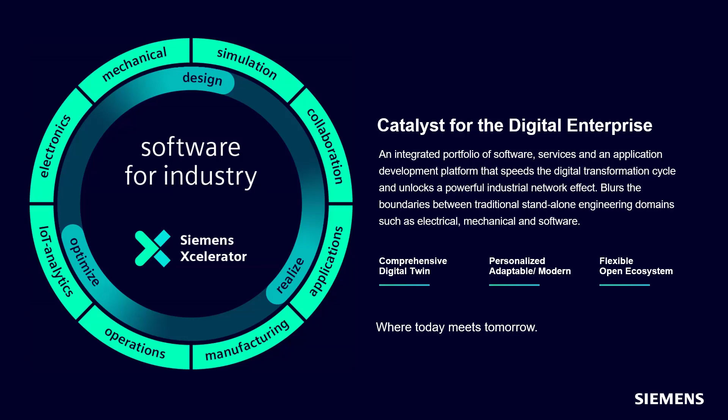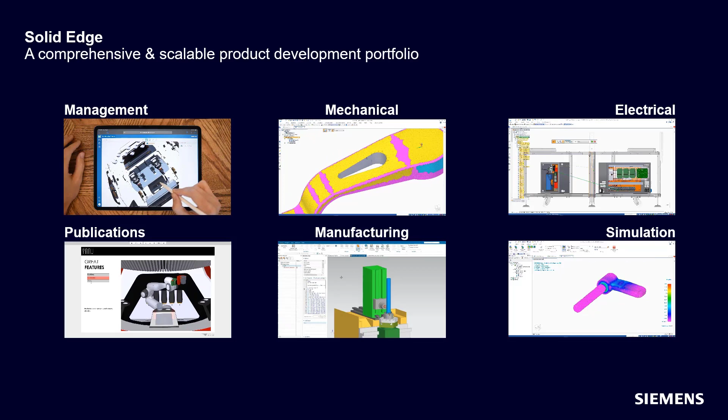Siemens Xcelerator really starts with Solid Edge. Solid Edge is a key part of the Siemens Xcelerator portfolio and is focused on the requirements of small and mid-sized manufacturers. Solid Edge enables manufacturers to create a comprehensive digital twin of their products, including solutions for mechanical design, electrical design, simulation, manufacturing, and publications. It also includes solutions for data management for all the technical data created and consumed when supporting the comprehensive digital twin. It facilitates collaboration both within manufacturing companies and external resources, including suppliers and customers. Solid Edge is truly your on-ramp to digital transformation.

We can help accelerate that digital transformation with Solid Edge 2024. Unleash the power of intelligent product design.

With this year's release of Solid Edge 2024, we continue to push the boundaries of product development. Solid Edge 2024 empowers users to design more intelligently across every aspect of product development. With a continued focus on the user experience and large assembly performance, Solid Edge 2024 introduces functionalities and enhancements to automate and speed design as well as collaboration. Here's just a few: there's 9 times faster graphical performance, AI assembly relationships, great advantages in intelligent dimensioning, and much, much more. Solid Edge 2024 is our best release yet.

Beta customers have already had an opportunity to experience Solid Edge 2024. Here's what one of them had to say: Each year, Solid Edge gets better and better. Everything is faster. You can definitely feel the excitement from folks like Karsten at FOCA, who had the chance to work with Solid Edge 2024.

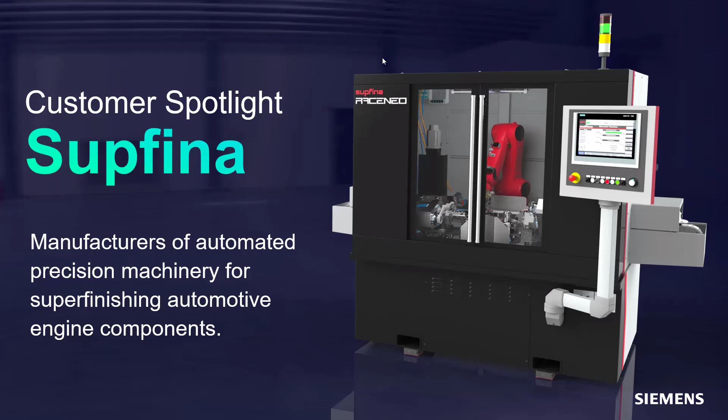Our featured company in this year's release is Supfina from Germany. Supfina produces high-precision, fully automated grinding and honing machinery designed for super finishing automotive engine components such as crankshafts and camshafts. Let's start with a look at some overall productivity enhancements. These are things that will definitely make your daily life easier. We are leveraging AI technologies in the design process and pushing them even further.

Let's focus on the polishing tool and fixture for these high-performance motorsport roller bearings. By expanding the assembly features in the Pathfinder, we notice a hole and cutouts were added at the assembly level and need to be completed with a round and a chamfer. This can be solved by reordering the assembly features with a new, simple drag and drop process that resembles reordering part features. This allows you to move the parent and child features together, keeping your model organized. The polishing tool has a 3D printed component that requires 2 holes to be added.

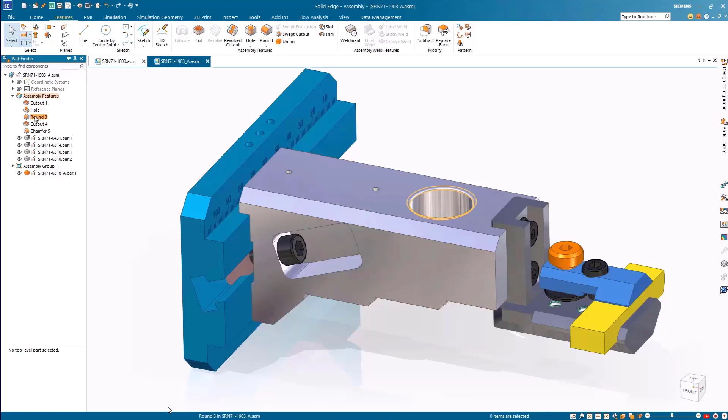To ensure an appropriate fit in the assembly for the 3D printed threads, we can define additional clearance holes using the hole command. The values can be put in either as a percentage or an absolute value. By selecting percentage, the internal diameter will increase by a percentage of the nominal diameter, seen in relation to the sketch. We can also switch the option to absolute and enter a specific measurement.

To finish off the assembly, the polishing tool can be added at the bottom of the cylinder. By adding a mate, planar line, and axial line with the hole, the component now matches the main assembly. Using the new Resolve Relationship Conflict dialog box, we can easily identify and suppress conflicting relations to resolve them swiftly. This new tool helps streamline part placement and assembly relationships. Hovering over listed conflicting relationships on the dialog highlights them graphically. One or more relationships can be suppressed at a time, and the requested relationship turns green.

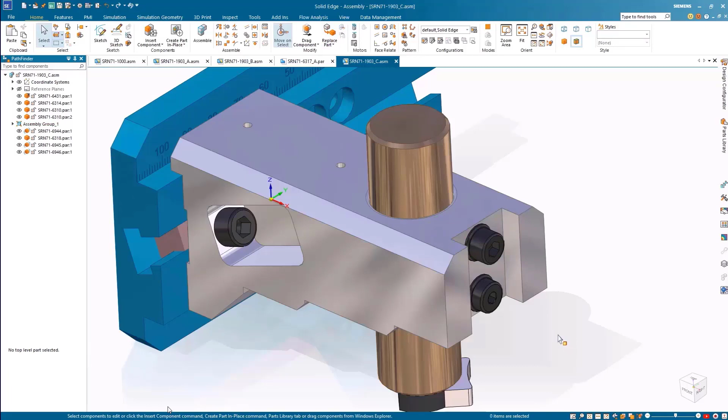The improved Replace Part command leverages artificial intelligence to predict solutions for replacing a single component occurrence constrained to a neighboring component within an assembly. The AI predictions support planar and axial line relationships and present the solutions in a secondary dialog, allowing us to preview and select the most suitable option before executing the replacement.

Enhancements to the variable table filter provide quick access to the filter options, resulting in an efficient experience that reduces both time and mouse clicks. The variable table can be used to reposition the polishing tool to ensure they will contact the bearing at the correct locations. With numerous variables in the assembly, the results can be filtered by user-created, system-created, or both. Another great option for filtering is to only view variables relative to the components that you select. This makes it easy to find the swivel angle variable and make a change. The vertical height of the polishing tool can be changed by updating the Z axis value.

One of the highlights you saw was physical thread clearance on 3D printed parts. This is really important because unlike manufactured parts, where standards define clearance and tight tolerances to keep things working smoothly, 3D printed parts can get clashes that prevent smooth operation. Solid Edge automatically eliminates these, ensuring your printed parts work effectively.

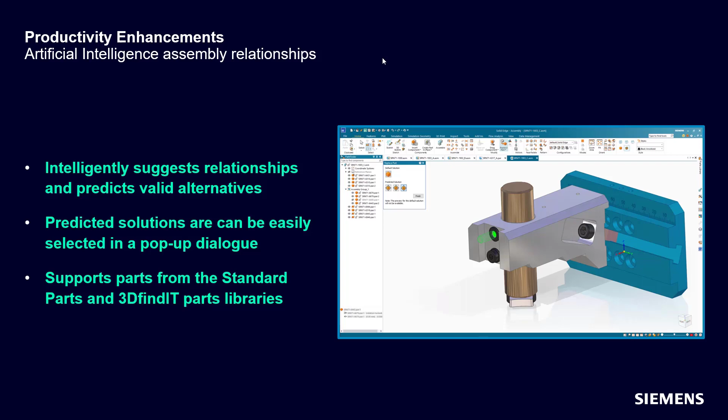You also saw the power of AI in action. With the improved Replace Part command, Solid Edge can now intelligently suggest assembly relationships and predict valid alternative solutions. These predicted solutions are graphically previewed in the design environment and can be easily selected in a pop-up dialog. In addition to working with your custom part designs, the AI-enhanced Replace Part functionality also works with parts from the standard parts and 3DfindIT parts library. Really powerful stuff that will save you a lot of time.

Here's what Dave Iverson of Ariel had to say about Solid Edge 2024. We love the fact that he said, do more of the fun stuff. The reality is we often end up doing tedious tasks. Let the computer do them. That's what AI in Solid Edge 2024 can deliver.

Let's take a look at some more productivity enhancements in Solid Edge 2024. Locating just the right part has never been easier. Search wildcards are supported in part libraries, model view palettes, and the Assembly Pathfinder. These wildcards provide flexibility when searching, allowing you to match and retrieve parts based on partial or incomplete names. Search results display subassemblies and parts in various shades of green for easy identification.

With the expanded family of parts options, flat patterns can now be included while working on sheet metal parts, containing the information you need to create drawings and annotations. Once we define the new members, we can see options to capture sketches, file properties, and variables. Further enhancements include the ability to set individual material properties per member, as well as control over the suppression state of sketches and etches. Selecting a specific member shows the material change alongside the different etches specific to each member.

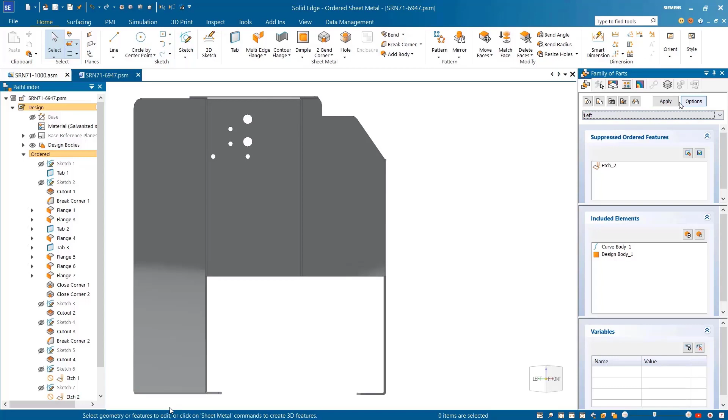Greater control of selecting objects has been added with the polygon and lasso selection fence options. This makes many common workflows much easier, like resizing holes. Using the lasso selection option, we'll select the desired hole and change the size. Polygon and lasso selections are available within the part, assembly, draft, and subdivision modeling environments.

Many designs require handed parts. These symmetrically opposite parts are identical, mirrored copies of one another. A new streamlined workflow makes it easier to create these left and right-handed parts that can remain associative to the original part if needed. With the selection of the face, mirror, and a quick save, the new handed part is immediately available for use. The best part of using the Save as Mirror command is that all the features used to create the sheet metal part are carried over, minimizing errors and making downstream changes easier.

The display of bend lines in the flat pattern environment is now supported within the sheet metal environment. Color coding defines bend direction: up bends are displayed in blue, down bends are displayed in green. The color and style of the center lines can be easily modified to suit your company standards.

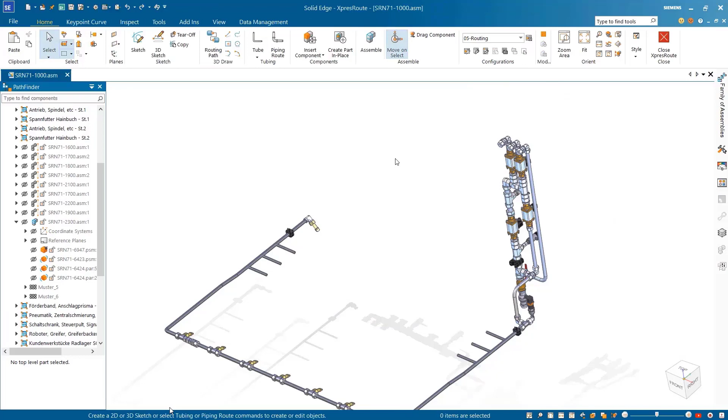In the Solid Edge XpresRoute, pipes and tubes can now be automatically trimmed with the help of the new trim command. In this example, after turning on the clipping planes, we can see there's an overlap between the main tube and the three cleaning tubes. We can trim these tubes so they join together seamlessly with just a few simple clicks. By selecting the primary and secondary tube, the Trim Tubes command intelligently cuts holes in the main tube and the outside diameter of the secondary tubes, and trims the cleaning tubes to fit.

Another new capability in Solid Edge is the Recent Documents Preview, where we can easily select a part we'd like to work on without exiting the design environment, saving time and energy.

The sheet metal cover requires some modification: the addition of several punched holes. Seven construction bodies have been placed in the sheet metal part to represent the punches used to remove the material. Using the Subtract command, we can select the main target body, then easily and quickly choose these bodies as a tool step, all within the same window. Unwanted regions left behind as a result of the subtract operation, or disjoint regions, can be intelligently identified and automatically removed.

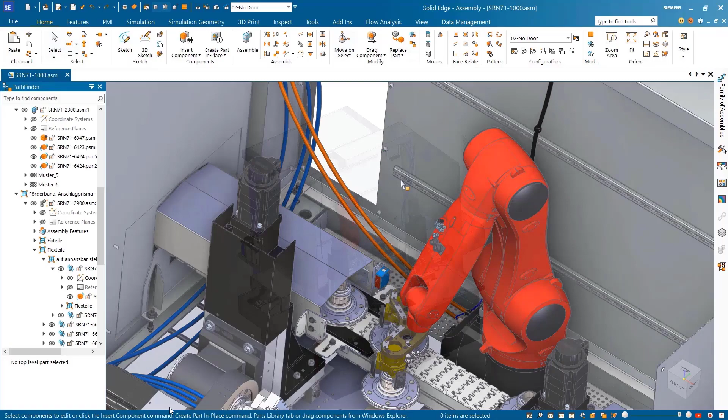Hiding the construction bodies, we can see all the internal disjoint regions within the sheet metal part have been removed. Now, obviously, Solid Edge has had the ability to create left and right-handed parts for many years. But did you catch the breakthrough here? Optionally, instead of just producing a body, it will create a mirrored part with a fully editable feature tree. This, frankly, was quite a tough problem, with quite a few requests for it. And we're very happy to bring it to you in Solid Edge 2024.

You also saw a ton of other great enhancements. Just to highlight a few, now Family of Parts not only creates correctly sized bodies based on the parameters, but it also supports material, etches, coordinate systems, sketches, and more. This was a long-standing request, and we're very excited to deliver. Lasso selection can be handy in so many circumstances.

Now it's super easy. In often requested enhancements, the new Trim Tubes command automatically trims and cuts holes in intersecting tubes in the assembly environment. It not only supports the tubes that butt against each other, but also end-connected tubes that can automatically be mitered. Variable table has been really improved, allowing users to access the filters more easily and quickly, saving time, money, and

reducing mouse clicks. When placing parts, conflicting relationships can now be automatically identified, giving the user the ability to resolve the conflicts easily with a pop-up dialog that displays the issues, and much more: matching coordinate systems, reordering the assembly features, removing disjoint regions, the list goes on and on.

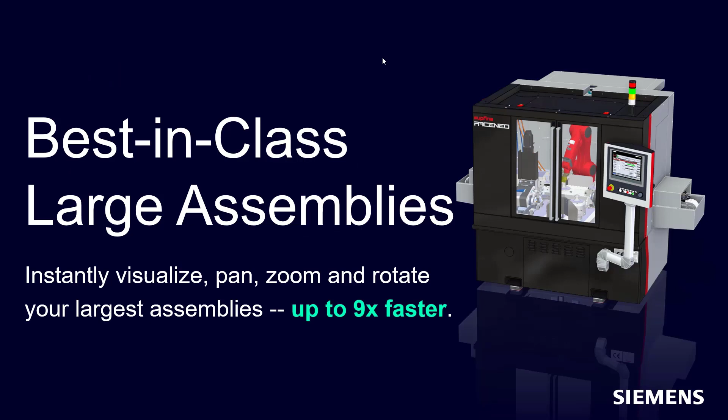Next up is large assembly performance. Solid Edge truly has best in class for large assemblies, and now it's even better. Better with model view performance that allows you to view and manipulate even the largest assemblies without lags, stutters, or buffering. New immersive view styles put your models into a real-world environment that automatically updates with the model in movement

for even more realism. As you can see, the view manipulation is automatically optimized, allowing users to run the most demanding assemblies at lightning speeds without the loss of detail or the need to adjust settings or hide features, parts, or assemblies. Dynamic viewing is up to 3 times faster on single parts and up to 9 times faster for very, very large assemblies.

Companies like Hatch are building some of the largest assemblies in the world, and as John notes, the Solid Edge 2024 advancements have a huge impact on their designers, as much as 30% productivity improvement.

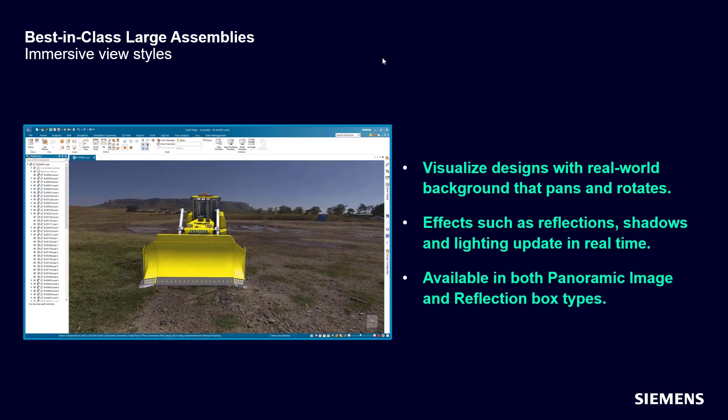In addition to the amazing speed improvements, you can now visualize designs in a real-world background that pans and rotates with your model to create a more immersive user experience. As the Solid Edge design is manipulated, graphic effects like reflections, shadows, and lighting are also updated. This creates a more realistic, lifelike representation of them in the model's environment, just like you were walking around the model in the real world.

Next up is Design Configurator, and I want you to pay special attention here because we know so many companies can benefit from this technology. Not only can you configure your own designs instantly, but we are now delivering pre-configured conveyors and ladders and other equipment that is commonly used in large machines and plants. It's an incredible time saver. Let's take a look.

Manufacturers are facing increasing pressure by their customers to offer greater choice and variety in their products. This can lead to an increase in the number of product variants organizations need to define, author, and manage. New pre-configured models in Solid Edge Design Configurator allow you to quickly and easily place intelligent datasets for ladders, conveyors, enclosures directly into your design.

The ability to customize fully configured subassemblies inside the main assembly helps simplify workflows and improve productivity. In this example, a fully configured ladder assembly is being modified directly within the main assembly environment. There's no need to go back to the subassemblies and configure them individually, saving you time and energy.

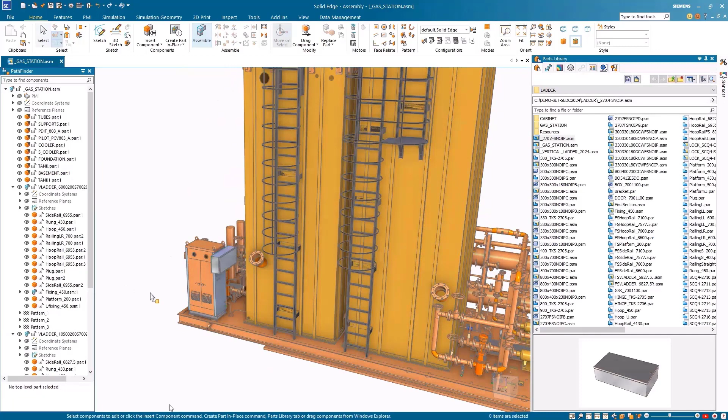A secondary ladder is needed to complete our design. After placing the ladder, we can customize the length. Due to the model's rules, a second section and hoop in the middle are also added. To finish up the assembly, we need to add a final cabinet. The cabinet can be customized inside the main assembly with the necessary dimensions and colors to fit our needs.

With access to fully configured datasets such as ladders and cabinets, it's never been easier for customers to get started quickly with Solid Edge Design Configurator. With the new subassembly command alongside the place part model and loop action commands, full assemblies can be placed and configured right on the spot.

With these new workflow model actions, brand new assembly lines can be built quickly and easily. Here, the base conveyors and other necessary components are being added to create a new assembly line. Solid Edge Design Configurator can automatically calculate the number of conveyors and other components needed to match user specifications.

By inputting 10 meters, the software automatically determines the number of conveyors needed within a specific time and distance to complete the line. With the last machine added, the new assembly line is finalized and ready to be used.

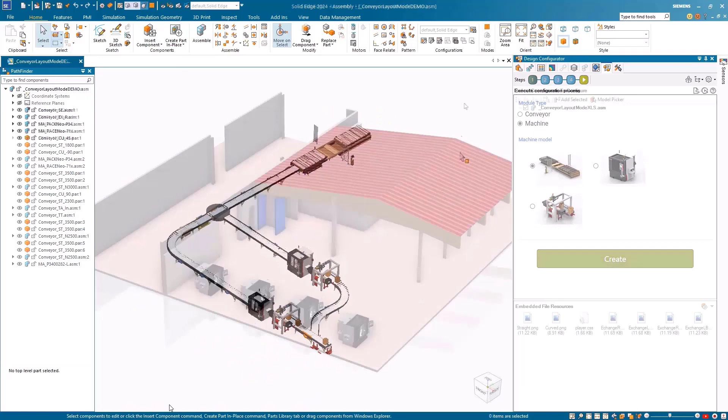The new ability to read Excel files and external databases for input data in the model action allows you to automatically complete assembly lines in a fraction of the time. By reading the necessary conveyor placement data from an Excel file, the software instantly configures and completes the assembly with just one click.

Wow. Isn't that amazing how quickly those ladders went into place and were fully configured in seconds? You can really boost design speed by using pre-configured models of ladders, conveyors, and enclosures. One of the most requested customer features, pre-configured models, downloaded from the Solid Edge Support Center, can now be directly used in the assembly at no cost to the Solid Edge Design Configurator users.

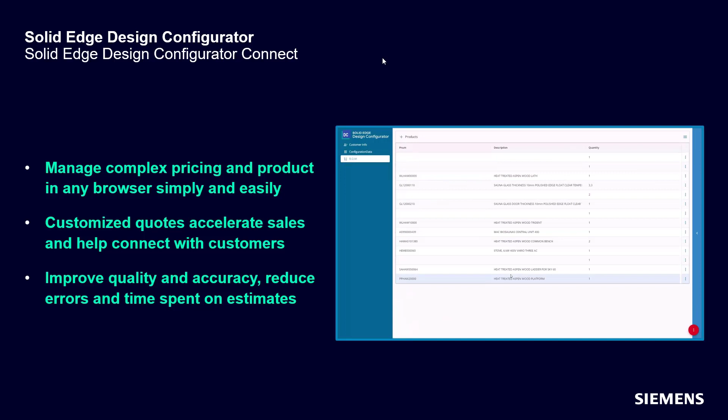In addition to all the great Solid Edge functionalities you saw configuring your designs, you can also take advantage of the Solid Edge Design Configurator Connect. This is a user-friendly, web-based configurator that manages the most complex pricing and product configuration, allowing users to configure online in any browser simply and easily by automatically generating sales documentation, including the 3D models. Connect your engineering process with sales and marketing, streamlining design workflows with the new Solid Edge Design Configurator Connect.

Michael Orr at Ariel quickly saw the value of Design Configurator and how it leverages data, your data and knowledge, to really streamline assembly customization. He notes that it could be a big time saver.

Model-based definition, often called MBD. It's all about moving the intelligence of the drawing upstream into the model. Why should the geometry be in the model and the critical information like tolerances be in the drawing? When we move all the intelligence into the model, we lower the 3D communication barrier and better convey design intent for downstream manufacturing processes.

Intelligently define and annotate 3D models while better conveying design intent for downstream manufacturing processes with the new Solid Edge Advanced PMI and model-based definition capabilities. The improved Auto Dimension tool in Solid Edge Advanced PMI can be used with 1 or 2 datums for more freedom while automatically dimensioning turned parts. Using the new Recent Documents preview will open another bracket that's been partially dimensioned.

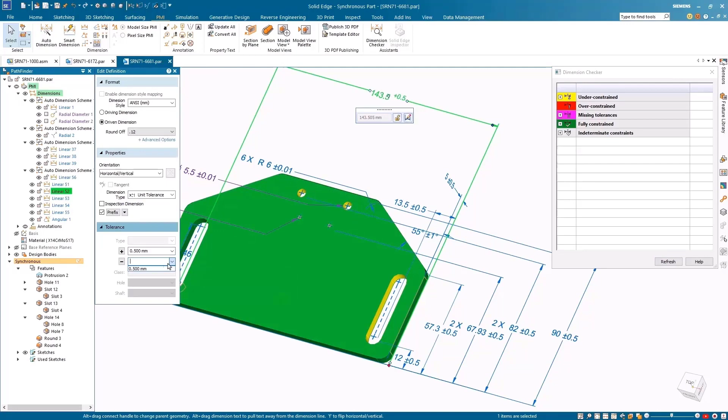With the new Dimension Checker command, quickly and easily identify the constraint status of features and parts. The model is automatically color-coded with feature IDs, informing you of the constraint status of features and if they lack any tolerance information. In this example, the slot and holes are under-constrained, and a dimension is missing a tolerance value. By adding the necessary tolerance, Dimension Checker will instantly update with the new status, and the Auto Dimension tool will automatically add the missing location dimensions for the holes, improving creation speed.

The improved Auto Dimension tool also includes stack dimensions and callouts for slot and oval cutouts. Features chosen in the selected primary, secondary, and tertiary planes can be auto-dimensioned instantly, and you can now automatically dimension location and size callouts for your created slot and oval cutouts.

The Common Model Views command allows users to create common model views automatically with the existing PMI. With the required views selected, Solid Edge automates view creation. Applying section views to a model view is easy with the enhanced vertical command bar that can be launched from the Model View palette. These easy-to-use command bars make editing model views simple, like adjusting the render mode as we see here.

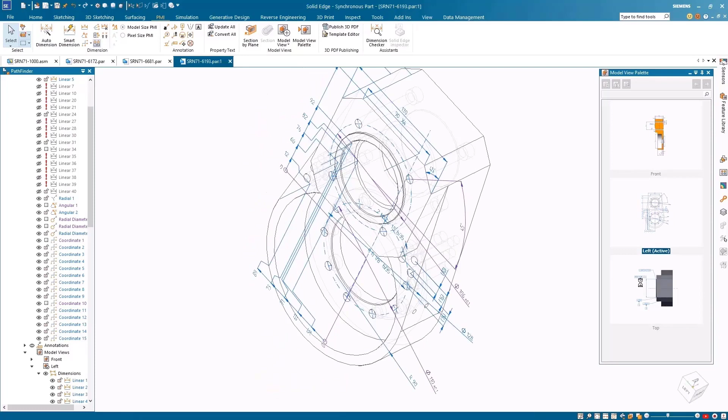To clean up the PMI dimensions, we'll run the enhanced Arrange Dimensions command, which provides the ability to arrange coordinate dimensions alongside the linear dimensions. The Update Model Views automatically updates all model views when the model changes or PMI is added or removed. Auxiliary plane indicators can be added, giving you more freedom to annotate the models based on ISO or DIN standards.

Convey design intent for downstream manufacturing processes with 3D PDFs that can be published using templates. You can now export PMI views with selected section views and render styles to the 3D PDF, including those created with single planes, to streamline the delivery of relevant design information. With new PMI face association, parent faces and section views are automatically highlighted when they are selected in the 3D PDF. For assemblies, 3D PDF documents can contain an interactive parts list.

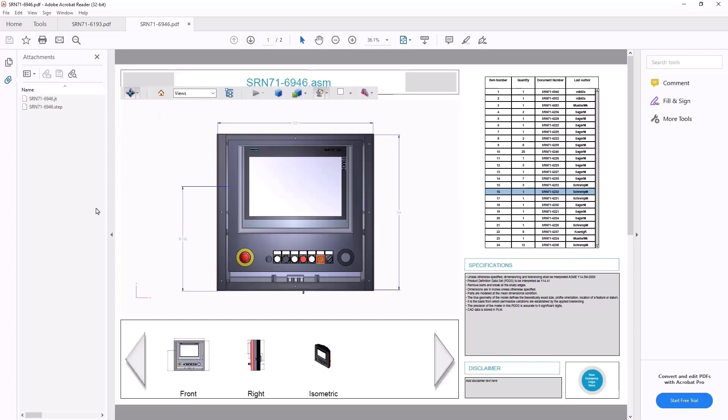On selection, parts are highlighted in the list and graphics window. Associative properties such as author can also be included. STEP, AP242, and JT files can also be generated and added as attachments within the 3D PDF.

Interoperability enhancements allow your Solid Edge files to look the same when opened in other Siemens Xcelerator portfolio solutions such as NX. The improved PMI association and support for various PMI data provide increased connectivity for downstream applications.

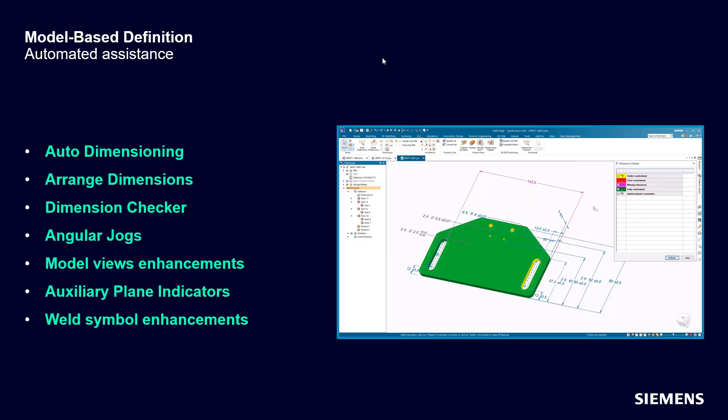With Solid Edge 2024, there are some great enhancements here to get you on this path. Auto dimensioning has a serious upgrade, and the Dimension Checker really lets you understand if your dimension scheme is complete. And there are many other enhancements. So now is the time to start getting going with Solid Edge model-based definition. And don't worry, you can move at your pace. Either drawings or create simple PDFs, it's up to you.

We're always amazed at how seemingly small improvements can make such a big difference. Ken at Pella was really taken with the new, better layout and the auto dimensioning it provides. A huge help to his team.

As mentioned before, don't worry, drawings aren't going away and Solid Edge will continue to be the best in the business. But if you are further along in your journey and looking to publish 3D PDFs, we've got you covered. For example, 3D section is now supported during Publish. And you can now graphically highlight items in the PDF and see where it's associated. This is really helpful in downstream interpretation.

We've been talking a lot about core CAD functionality, and that is truly important. But more than ever, collaboration is key to improving engineering productivity. No one could have anticipated how distributed our teams would become in recent years. But we definitely have some amazing tools to support this. And this comes in the form of Solid Edge SaaS, where collaboration is built right into your daily work. We'll be taking a closer look at this later in our session.

You can access Teamcenter Share's comprehensive suite of collaboration capabilities fully in the Solid Edge environment. The complete Share Web user interface, UI, is embedded entirely within Solid Edge 2024 for more streamlined collaboration workflows. The same browser-based experience of Teamcenter Share is available anytime, anyplace, on any device as before, but now Share is also available without leaving Solid Edge. This saves users time by eliminating the need to switch between the different application windows.

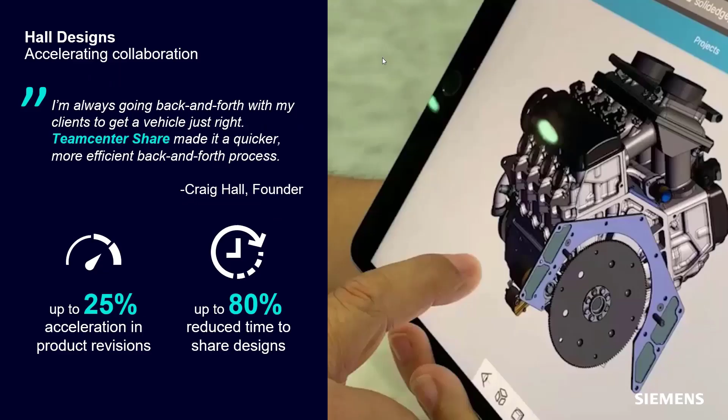In addition to Sunny Bay, many other customers are already doing great things with Solid Edge SaaS and the built-in Teamcenter Share, like Craig Hall at Hall Designs. Hall Designs are using the new cloud collaboration capability of Solid Edge SaaS to collaborate more effectively and reduce their design and development time and dramatically streamline their communication with clients. Look at these numbers, 25% improvement on revisions, 80% time savings sharing the designs. Now that's pretty substantial productivity.

Solid Edge CAM Pro also received a great update. Get faster and more accurate programming with Solid Edge CAM Pro. Let's take a look.

Solid Edge CAM Pro improves productivity by enabling artificial intelligence to present the machining options that are used most frequently with AI-assisted operation editing. The prediction node will guide you through the operation editing process. Suggestions will be made based on the machining application and your programming style. Over time, the prediction tab will contain the items you most frequently edit, making it the go-to spot in the operation. No more hunting for options, as the AI assistance is customized for each user based on your preferences.

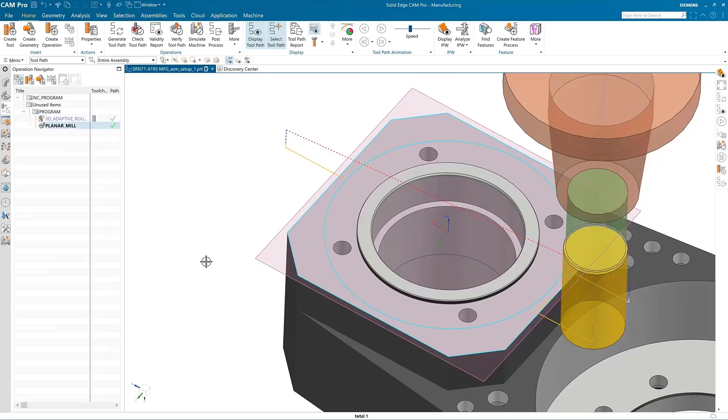With auto-generate for simple turning operations and certain 2.5-axis operations, you no longer have to generate the operation. As soon as enough parameters are available to calculate the toolpath, Solid Edge CAM Pro takes care of it. This makes NC programming faster, allowing you to review the results quicker. Similarly, any changes that require recomputation are automatically performed. See the latest results as soon as the parameters are changed.

Prime Turning by Sandvik increases productivity by removing more material in a shorter amount of time, enabling faster speed and increased tool life. Using either Sandvik CoroTurn Prime A or B turning tools, we can quickly, efficiently, and safely remove the material from this undercut. Notice how smooth the entrance and exits are, which produces less stress during the cutting and helps the inserts last longer.

3D adaptive roughing provides the most efficient rough machining possible. It reliably and dynamically checks for tool holder collision when the tool moves within a region or across multiple regions. Toolpath generation is faster, bottom-up cutting has been enhanced, and a top-off flat faces option has been added for faster throughput.

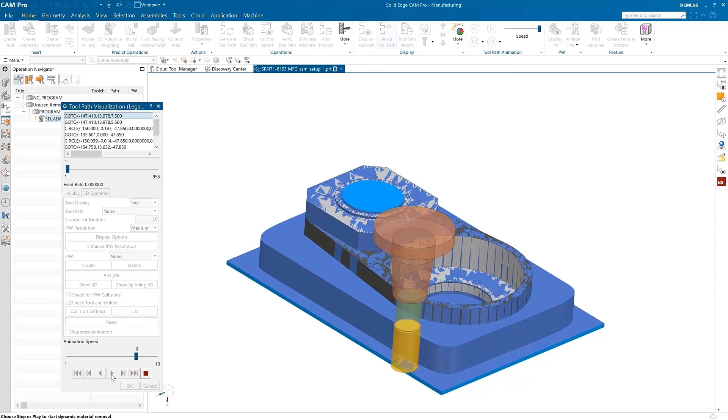The Cloud Connect tool library, as the name implies, stores cutting tools in the cloud database for easy access. Tools and holding devices can be easily searched, downloaded, and modified. Immediate access to cutting tool vendors is also available from the same location.

Generate toolpaths on flat surfaces with complex shapes using the face mill mid-pass operation. This feature, perfect for the milling of casted flanges or any other oddly shaped flat surface, automatically calculates the midline distance between the edges of a face and places a toolpath on it. For users that desire the cutter to be off-center of the flange, the operation can also create a toolpath along a shape described as the convex hull of the face.

The face mill mid-pass operation can greatly improve productivity for this type of machining, eliminating the need to manually create a boundary line for the cutter to follow. This allows you to create the operation in minutes as opposed to hours.

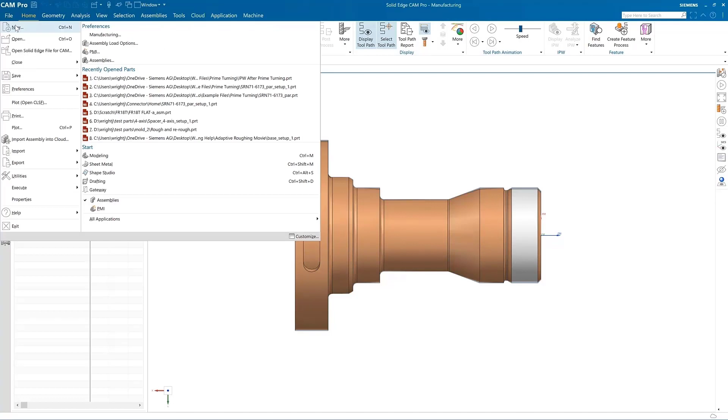Save your in-process workpieces as faceted bodies in separate files. These models can be used for future machining operations, the creation of manufacturing planning operations, or the construction of secondary machining fixtures and jigs. These in-process workpieces can be saved at any stage during the machining process, even in the middle of an operation.

Turn milling is designed to easily machine symmetric and eccentric cylindrical surfaces with high surface quality, precision, and high cutting volume. An operation subtype in the rotary milling template, turn milling is used to pre-cut cylindrical parts before finish machining with other rotary milling operation subtypes.

Solid Edge CAM Pro provides cutting-edge updates that accelerate machining while bringing the power of artificial intelligence and the cloud to your machining processes. There are some real time savers in there. The 3D adaptive roughing means faster programming and more efficient machining, while the AI-assisted operation editing predicts the most probable parameters, accelerating programming processes and ensuring accurate repeatability.

The new prediction mode will learn from the user's best programming practices to dynamically change and predict user behavior. The Cloud Connected Tool Library is a new application that utilizes the cloud and provides a user-friendly, intuitive experience when previewing tools and dimensions. And Prime Turning is now supported. Prime Turning is a new methodology which enables turning in all directions, resulting in a 50% productivity increase for turning operations.

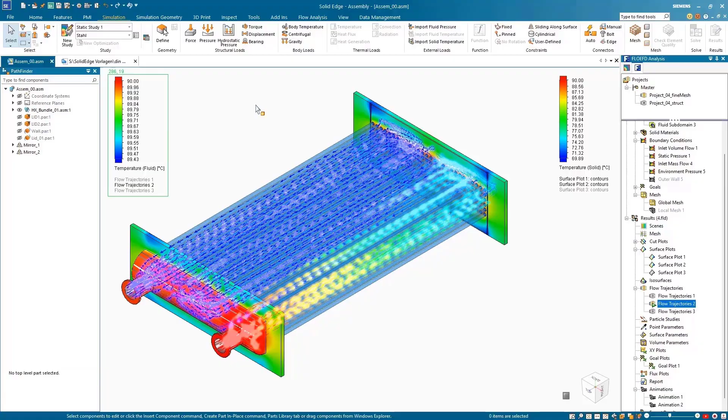Enhancements in Solid Edge simulation and Simcenter FloEFD for Solid Edge increase simulation performance and speed with improvements on meshing, structural analysis, and interoperability. Let's check that out. Increase your simulation speed, performance, and reliability with new enhancements in Solid Edge simulation. Instantly import solid temperature results from Simcenter FloEFD for Solid Edge into a static simulation study with the new Import Solid Temperature command in Solid Edge simulation.

In this example, the results of a FloEFD simulation in a heat exchanger and the temperature distribution of the fluid flow on the parts are shown here. Switching to Solid Edge simulation, we already have a study created with all constraints but without any loads. Using the new Import Solid Temperature command, we can set the load for our simulation study and start the solve. The Solid Edge simulation study processes the results from FloEFD and solves the calculation.

Viewing the results, we see high stresses in the parts as a result of the temperature loads. Interoperability between Solid Edge simulation and Simcenter FloEFD for Solid Edge enables you to find thermal stresses and deformation in solids, helping understand part behavior and avoid failures long before real products are manufactured.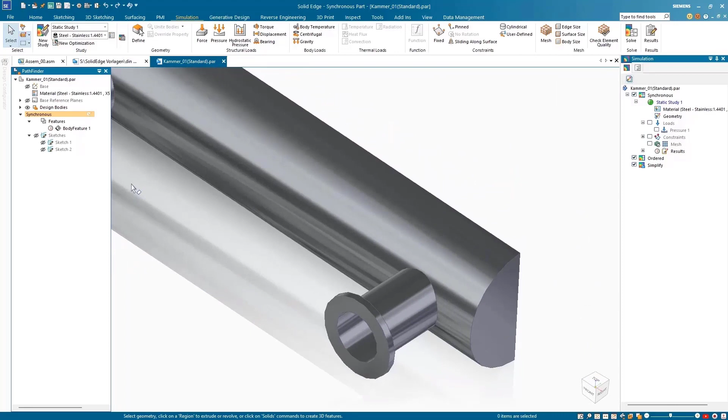The option to apply force to any given point in Solid Edge simulation grants you greater control and flexibility in your simulation studies. In this example, a study has been created to show what happens when the component is put under an internal pressure. To run further analysis and determine additional loads, we will define an additional sketch point to add force to. The user-defined point option allows you to select any 2D or 3D point on the component and apply a specific force. We'll set the force direction, solve the study, and then review the results.

The enhanced mesh quality checks in Solid Edge simulation can automatically analyze and identify poor quality areas in complex mesh models. The check quality command instantly identifies and highlights the poor quality areas in the generated mesh. With the intelligent mesh quality checks, you can easily find the problematic areas in the mesh and fix them early on in your workflow, significantly decreasing errors. Continue to increase your simulation speed, meshing performance, and reliability with Solid Edge simulation and unleash the power of intelligent product design.

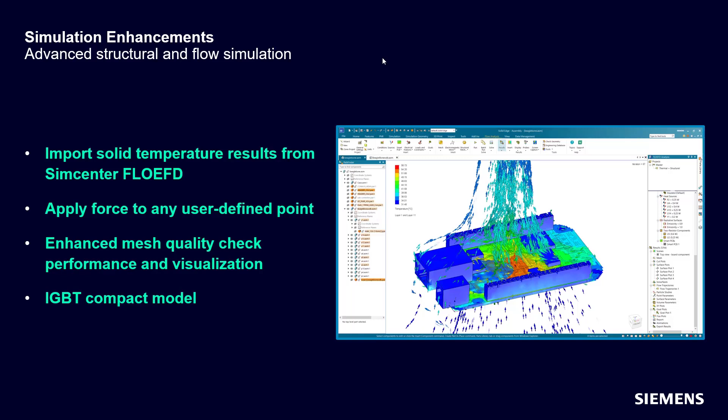As you saw, Solid Edge simulation users can now import solid temperature results from Simcenter FloEFD into Solid Edge Study. The new option to apply force to any user-defined point rather than just a mesh vertex also allows for greater control of simulation studies. And the display of mesh quality checks have been improved to make it easier to identify poor quality areas.

Finally, the insulated gate bipolar transistor, or IGBT, compact model is now composed of an electrical element and a 2-resistor component. Conducted compact models provide a very efficient representation of the IGBT element.

Now, let's talk about value-based licensing, which is a truly important innovation, allowing you to explore and use a wide variety of Solid Edge portfolio products at one very low cost. Rather than traditional purchasing of individual products, value-based licensing provides a cost-effective bundle of licenses or tokens that can be used across Solid Edge add-on products, and you can use those on demand. You get instant access to advanced functionality that can be shared across your product development teams and on an as-needed basis, all at a much lower cost than buying each individual product.

Let's look at the list of products within value-based licensing. These are all valuable products, but are you going to use each one every day? What if you could just mix and match and decide what you want to use at any time without having to buy the individual products? Well, now you can. Generative Design Pro, Point Cloud Visualization, Solid Edge Simulation Advanced, and all the others here are available through value-based licensing.

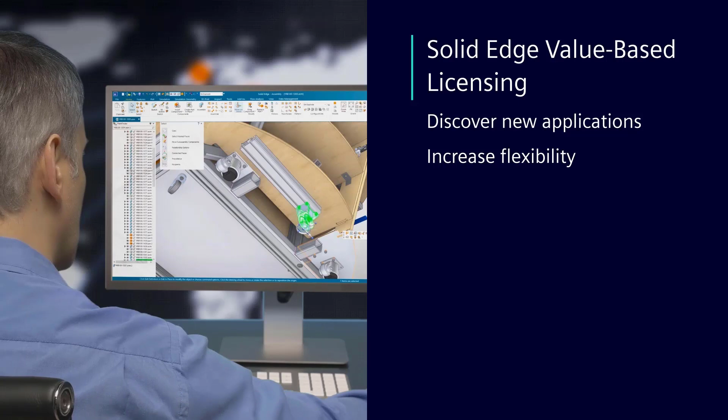New for Solid Edge, value-based licensing. A flexible licensing option to help you with the challenges of a rapidly changing development environment. This approach allows you to discover new Solid Edge add-on products while increasing flexibility for you and your team. Let's have a look at how value-based licensing works, starting with the base application, Solid Edge Classic or Premium. Value-based licenses offer a fully flexible environment in which users can explore different functionalities.

Companies acquire a set of tokens, which allow the running of a wide array of applications. Tokens are available in yearly subscription packs that make the add-on products available as a single shareable bundle. Tokens can be checked in and out to allow for maximum flexibility. Each add-on product consumes a defined number of tokens when in use. The total number of applications and which specific applications can be checked out is limited by the number of tokens users have available.

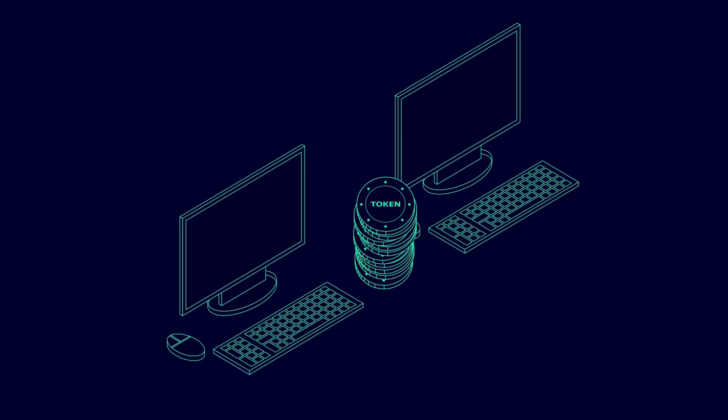Value-based licensing is even more flexible when combining multiple users, each with their own desktop instead of tokens. Just imagine, a worker is confronted with a maximum token limit. By having a joint token pool, the limitation is automatically lifted as he or she is able to claim unused tokens from a colleague. In this context, it's also perfectly possible for users to use the same application simultaneously, as long as the token maximum isn't breached.

Value-based licensing gives you the ability to manage costs, discover new applications, and easily scale your business. In many cases, the total investment is less than individual licenses, yet the flexibility dramatically increases regardless of whether the modules are used daily or occasionally. Value-based licensing, new for Solid Edge, offers a truly flexible, cost-effective, simple-to-scale approach that reduces risk over time and encourages users to maximally explore new possibilities.

You can see how this can add a whole new dimension of flexibility and access to your product usage. Tokens are available on yearly subscription packs of 25 and 50, making the add-on products available as a single shareable bundle. Tokens can be checked in and out to allow for maximum flexibility. Users can mix and match the add-on products as needed within the permitted token allowance. It's really the ultimate in flexibility, giving you access to technologies you never thought possible at an unbeatable price point.

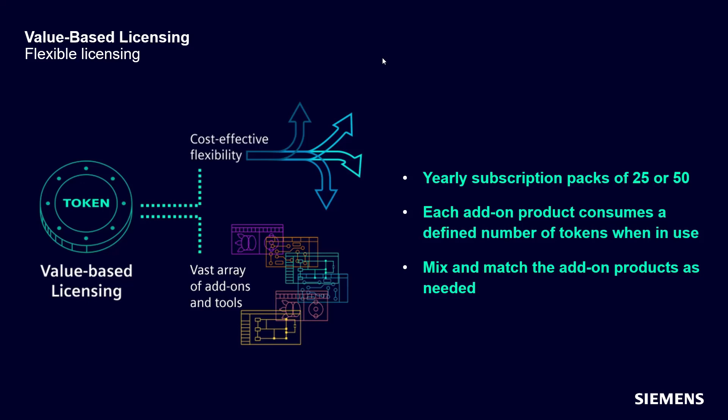In addition to all the wonderful enhancements you've seen in Solid Edge itself, the Siemens Xcelerator portfolio is the most powerful in the industry. With Solid Edge, you can connect to many other powerful applications that are part of our Siemens Xcelerator, like NX or Teamcenter.

Let's take a look now at Solid Edge and Teamcenter, and how they can closely work together in a product configuration scenario. Engineering complexity explodes as products become more complex. Product lifecycle times become shorter, markets and manufacturing go global, and customers demand more choices and customization. Companies need a solution that enables them to manage this complexity from product inception through manufacturing in a simple way that enables reuse and commonality and eliminates engineering cycles on products that will never be offered on the market. Teamcenter and Solid Edge are industry-leading solutions that address these challenges with tight integration.

Here's a hand drill assembly which has been configured with product family members, product features, and variants in Teamcenter. Here we are seeing a full 150% bill of material, and if needed we can apply a variant which updates the bill of material accordingly. This hand drill assembly has been configured with 3 variants.

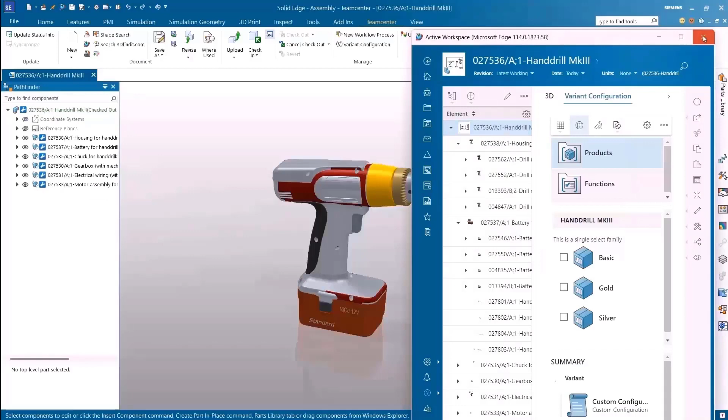Once opened in Solid Edge, we get the option to load a 150% unconfigured bill of material, or we can select a product variant which loads a 100% bill of material. We'll select the standard basic variant from the product family and load it into Solid Edge. All the components associated with this variant are loaded, and we can verify this by expanding the subassemblies to visualize the components associated with this variant.

The list of product variants defined in Teamcenter can be viewed, and the active variant currently loaded in session is highlighted. This information is synchronized between Teamcenter and Solid Edge. We have full control whether we want to load a different variant, load more than one variant to provide a 120% bill of materials, or load all variants to create the 150% bill of materials. If needed, we can edit and move components as we have read and write access. With seamless integration between Teamcenter and Solid Edge, you can build your products faster to meet your customers' requirements.

It's great to see that tight integration between these products. Teamcenter Product Configurator, which enables users to create variant configurations and assemblies, is now fully embedded in the Solid Edge environment. This allows you to take full advantage of the digital twin by using a common variability thread for highly complex products. Powerful impact analysis technology is also available across the product suite.

We've also significantly upgraded the interop with NX. Changes to PMI in Solid Edge now automatically update in NX, and the PMI from Solid Edge files look the same when opened in NX. Support for stacked annotation, center marks, center line, bolt hole circle, and more is also now available. Additionally, assemblies created in Solid Edge that contain internal components now open correctly in NX. And for those customers using both Solid Edge and NX, NX value-based tokens will run Solid Edge value-based products. So it's easier than ever to mix and match and interoperate between these two systems.

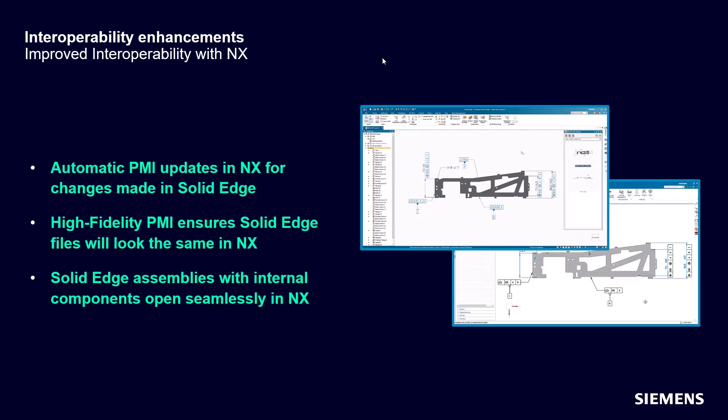We've also expanded interoperability and collaboration between other parts of the Xcelerator portfolio. For example, Technical Publications and Solid Edge Inspector are both integrated with Teamcenter Share, and Solid Edge Inspector now fully integrates with Opcenter and Teamcenter Quality.

At Group SEB, a longtime Solid Edge user, Olivier believes these interoperability functionalities and others across the Siemens Xcelerator portfolio give him and his team the right solution to meet their current and future design challenges.

Not only does Solid Edge work great with other parts of the Siemens Xcelerator portfolio, it also works great with data from external sources. So whether you're switching from another CAD system, reusing legacy design data, or working with suppliers, Solid Edge makes working with third-party files as easy as native data.

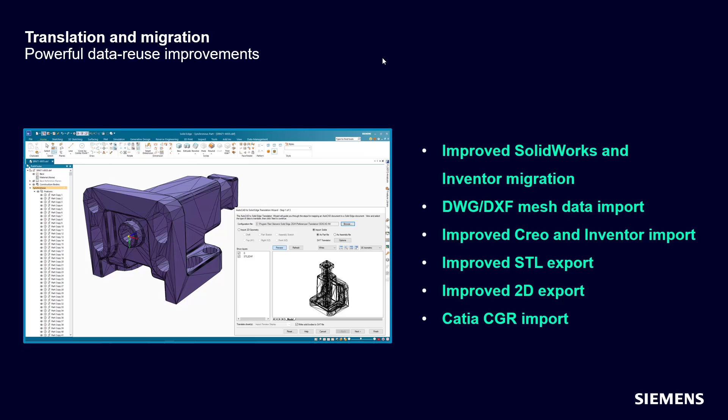For those of you migrating from other systems to Solid Edge, we've continued to make our best-in-class tools even better. Those of you coming from SolidWorks and Inventor will see even more complete and easier to use tools than in the past. We've enhanced many of our data sharing pathways such as STL, Creo, and even 2D.

Solid Edge is certainly our best release yet. We're excited to bring you new functionalities and enhancements because we know they'll help you streamline your productivity.

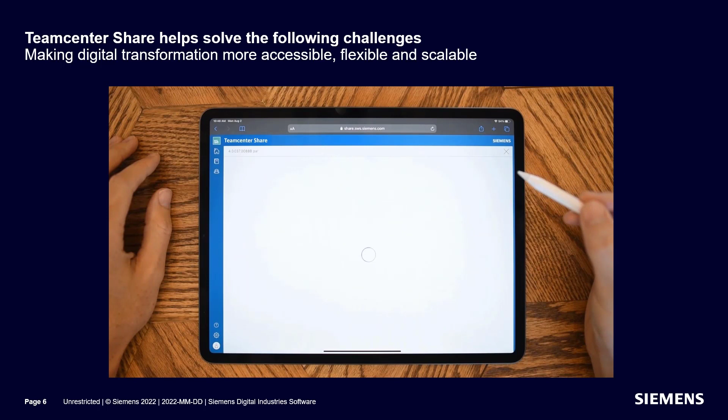For CAD files, there's an integrated 3D view environment where you can hide and show parts, explode assemblies, section, measure, and markup. This is great for manufacturing and design reviews.

Here, we're identifying the need for some changes with a markup and some accompanying text annotations. Teamcenter Share offers maximum traceability as all markups are recorded, enabling conversation back and forth on any of the issues you're tracking. It also records who made any markup and when it was made. We can easily go back to the markup at any time.

With Share, you can also connect your CAD, synchronizing your data from your desktop to the cloud. Here, we have the same espresso machine project on our desktop, represented simply as a folder. Any data that we save in this folder will get synchronized in the background.

In Solid Edge, we can securely sign into Teamcenter Share and see those same cloud-based projects. The espresso machine can be opened, and we can get right to work on the part in question.

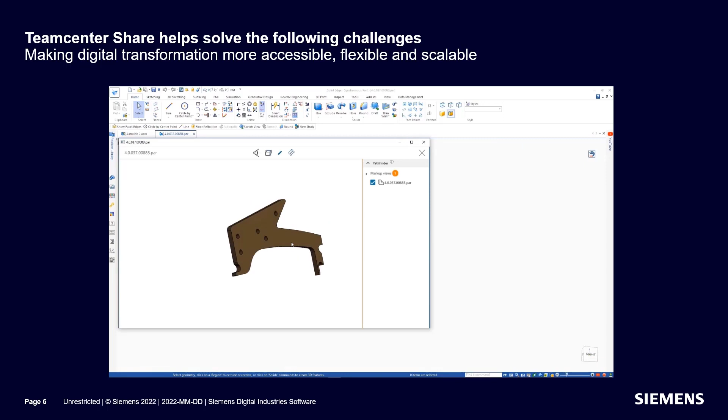The designer can easily access those same markups in the cloud directly from within Solid Edge. And then, of course, go ahead and complete the work, which in this case is to add a cutout to the leg of the espresso machine.

Once complete, another markup continues that two-way conversation and collaboration with other stakeholders so that issues are tracked appropriately.

Another great capability is sharing projects with anyone. Simply enter the email address of the person with whom you'd like to share and choose their access permission level. Here we can choose View, or View and Download, or Edit and Download, depending on how we want to protect our intellectual property. We'll share this design with one of our colleagues and our customer and give them the appropriate access.

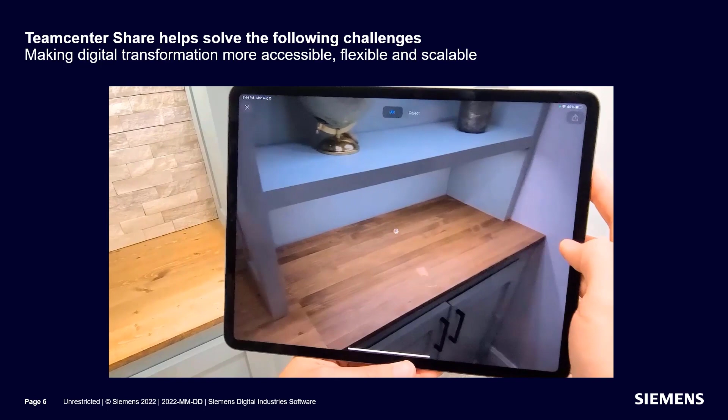Finally, with Share's augmented reality functionality, we can see exactly how our design will look in the real-world environment. It will snap the design onto any surfaces that are seen through the camera lens at the correct scale. Then, finger gestures can be used to manipulate the model and easily visualize what the design looks like in the real environment.

With Solid Edge and Teamcenter Share, you can work from anywhere, synchronize your data, and use design-centric tools such as 3D and 2D CAD view and markup, augmented reality, virtual prototyping, secure project-based sharing, and much more.

So let's summarize what we saw. Teamcenter Share provides you a secured cloud storage. It allows you to work with the cloud as well as it allows you to sync with the desktop so that you can work offline. It's a permission-based solution, so you can set the roles and access levels within the project teams and really manage the collaboration effectively.

It has got its own task management, simple workflows that you can set up and monitor your projects. It is engineering centric, so you have CAD files, engineering data. You can do a lot of things such as view, markup, measure within its environment, helps you accelerate the project tasks. Comes with augmented reality capabilities. It has got its own messaging capability. It is integrated with the email system that it uses. It has got notifications based on the project tasks and updates.

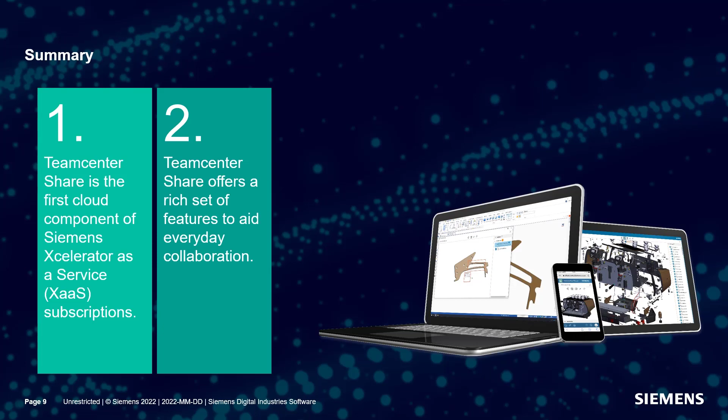Start using it. So in summary, there are three main takeaways. One, Teamcenter Share is the first cloud component of Xcelerator as a Service. It is not a standalone product. It comes along with every hybrid SaaS implementation. Two, Teamcenter Share offers a rich set of features to aid everyday collaboration. And three, Teamcenter Share contributes to making digital transformation more accessible, flexible, and scalable at all levels.

So Teamcenter is a collaboration backbone for the Xcelerator portfolio used to plan, design, and share product information and manage workflows. For all our customers who are using Teamcenter, Teamcenter should be where internal users go to access product information. Teamcenter Share extends your ability now to collaborate with individuals and teams outside your company. As Teamcenter customers, you can securely share CAD and other files with external collaborators for ad hoc projects and synchronize updated files back in Teamcenter. How cool is that.

So let's talk about the updates from the recent release in December. In the latest release, you can now organize your display. You can organize your columns. The column selection dialog is now enhanced, so you can select and put together the list of columns that you want to see and lay it out in your user interface. Many of you use Solid Edge built-in data management. Now Teamcenter Share can bring in those properties that you have defined in Solid Edge data management into the Teamcenter Share user interface.

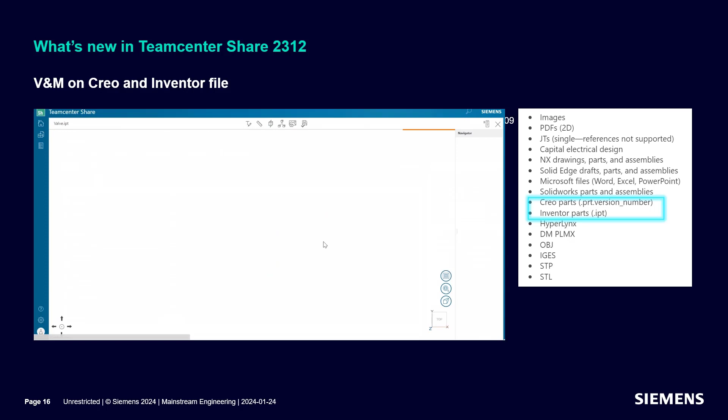We have now extended the support to many other engineering data types, including Creo parts and Inventor parts. So the list of file formats that Teamcenter Share supports is expanding as we go. One of the areas that has seen enhancements is augmented reality. Now you see better display, shading and coloring capabilities that have always been asked for by customers. Some of the customers really asked for it, and now you see those implemented in the recent release.

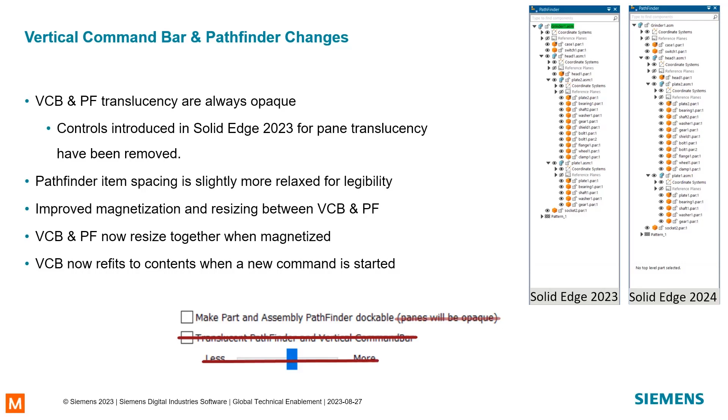Thank you very much. Let's take a look at Solid Edge 2024 mechanical design. First, some user interface enhancements. Improvements in the vertical command bar. Better spacing between elements, and translucency is no more. Better scaling for the context toolbar. Commands better support the object action workflow throughout the software. I encourage you just to try that as you use the software.

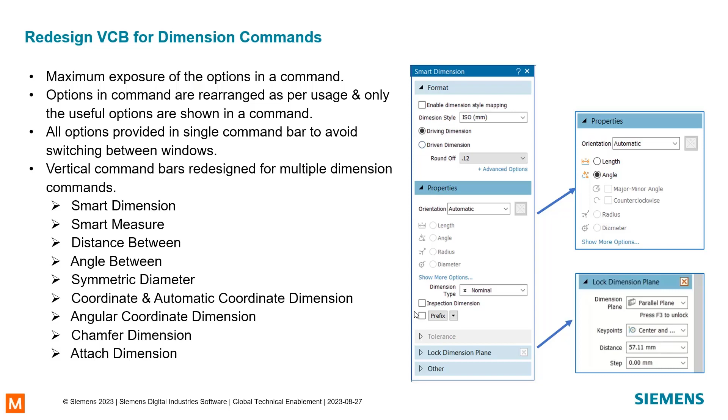In-app 30-day trials to discover new capabilities in the software. And a really nice recent documents preview at the top of the application. Options are now searchable, making it easy to find just that setting that you need to tweak. Redesigned vertical command bar for dimensions and a few other commands, taking advantage of the extra real estate that we have on those vertical command bars. For example, the redesign of the assembly relationship bar, adding the widget.

So let's take a look at some user interface enhancements. First, the recent menu here at the top. Quick way to get what you want. I'm going to go ahead and open this simple part. We'll take a look at the opaque, nicer looking Pathfinder, context toolbar, better spacing for icons. Notice how the transparency fades away when you move your mouse away. You can go and do whatever you want. You can maybe isolate or use whatever command is available on the context toolbar.

And let's go ahead and maybe make a drawing real quickly. And you can see the object action: you could see the context toolbar with very little mouse movement. It gives me the ability to create a parts list and go ahead and drop that down. And when selecting other objects, like maybe this balloon for example, you get the properties very easily without having to right click. It's just right there at the left click.

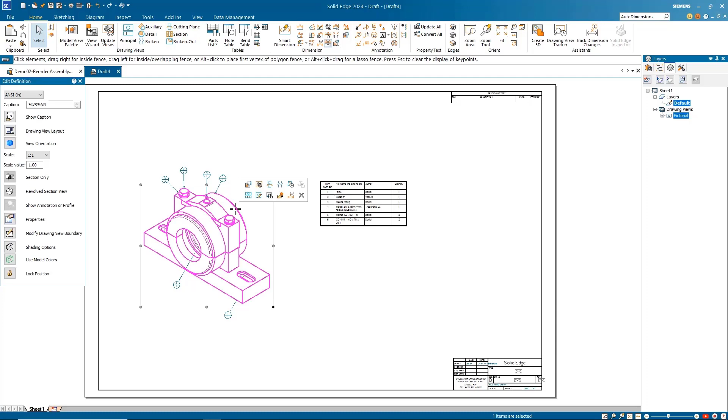So pretty much just learn about it through discovery, take advantage of the context toolbar and the object action capabilities. You can also do it by selecting the object and then using the command. You probably remember the parts list always asks you to select the view first, but if you select the view first, it won't ask you. So just better workflow throughout.

Next up is part modeling. Nice improvements to family of parts. Now you can have a separate material, file properties, and even etches are separated out per member. I'll show you that in a demonstration. Multiple bodies are also supported in family of parts. This is very useful, and I have a demonstration for that as well.

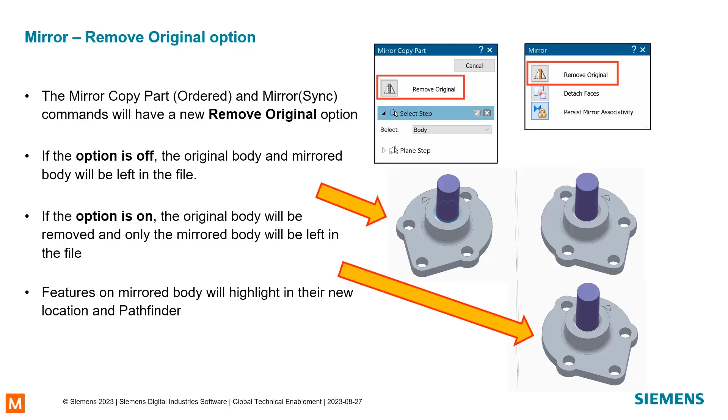Flat pattern features now work within the multi-body, so you can have multiple published flat patterns. And mirror part now has the option to remove the original, so you can create an opposite-handed part very easily now. And some more information, save as mirrored part is very similar, where it essentially saves out a separate part file, but it's mirrored and has the option to be linked to the original or not. Very streamlined workflow. Let's take a look.

Here we have the right-handed version of a sheet metal part. We already have an etch indicating that that is the right-handed side, and we do have a mirror in place already just to speed up the demonstration. And we'll first take a look at mirror copy part. You can see the save as mirrored that we just spoke of is here as well, but mirror copy part, super easy. Select the body, select the plane, and here we have the option to remove the original. Really nice. So I'm going to make a left-handed version of this sheet metal part.

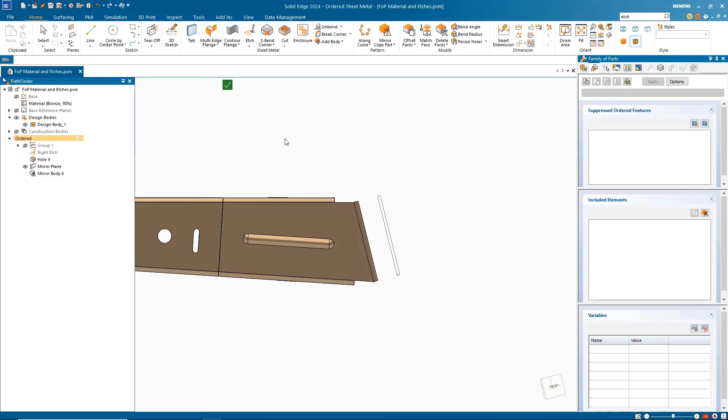I'm going to just go ahead and make a text profile. And then we'll create our etch from that. I can probably hide the original sketch. So very quickly we made a left-handed version of the part. Now let's take a look at family of parts. We'll create a new member. We'll create the left, and we'll create the right. And those are all ready to go.

And if we use the edit table, you'll see in the options you have the ability to turn on the visibility of other things. We have all our features here, so there's our left and right version. So what we'd like to have is the etch we just created. On the left-handed side we do want that, so we unsuppress it, and on the right side we want to suppress it. For the mirror feature, that needs to be available on the left but suppressed on the right. And the original etch, that would be suppressed on the left and included on the right.

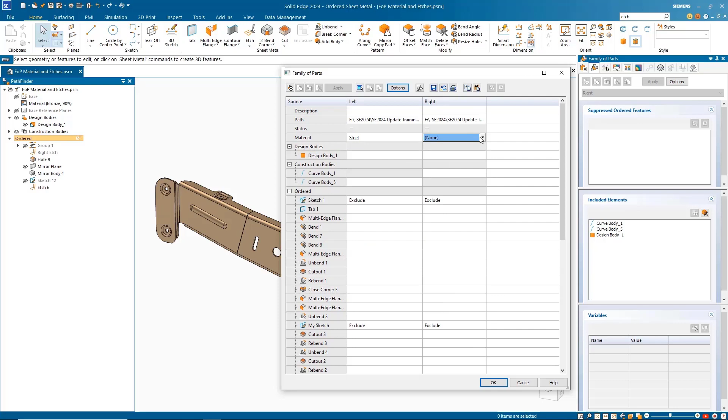And also we can take a look at the material, so we can publish out independent materials now as well as properties. So if I chose, say, copper and steel, so I hit OK. And now we have two members. If we choose right, and apply. There's the right. You can see the material is different. And if we choose left and apply, there's the left-handed version, which is steel. A great enhancement for Solid Edge 2024.

And let's take a look at another part. So this is a multi-body sheet metal part. If we look over here in design bodies, you'll see that there's a center, a left, and a right. You may or may not be familiar with multi-body, but the benefit here is that these parts all fit together, and we can conveniently have them all in the same files so we can easily make edits and ensure that they fit. Now they are sheet metal files, so we would like to eventually have flat patterns.

So if we go to the flatten, first of all, we'll check out the bend lines that we now have in the flattened state. So you see we have 3 flattens. Each one goes with each body. I've gone ahead and created these beforehand, and now you essentially have the ability to include the flat the same way as you would a feature. So it's very much like what you're familiar with in Family of Parts, except you can include a flat pattern for each specific member. So when you publish out each member, you will have a flat all ready to go.

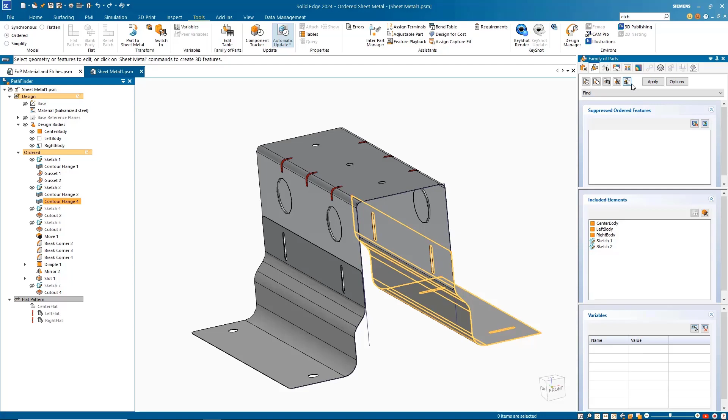And there's an option here that you probably want to have turned on to just make the flat pattern available in this window. And it's actually very easy to use if you just play with it a little bit. Great new enhancement, Solid Edge 2024. And if we take a look at our FOP table, you'll see that we also have the option here for Property Manager. This is a great way to manage the properties for each member. And let's go ahead and maybe open one of these.

So you can see that when we open it, we have our flat pattern all ready to go in that member separate part file. Your insert part copy command has also been improved in Solid Edge 2024. This is a nice enhancement.

We've had support calls asking how to move the position of an inserted part copy into the target document, and this solves that problem. You now have an updated dialog to better support some of the new options, and you have 2 settings to select the source and the current document coordinate systems.

So you can create a coordinate system in the source document precisely where you'd like it to line up, and one in the target document, and that just really makes short work of precisely inserting a part copy exactly where you want it. Let's take a look at that.

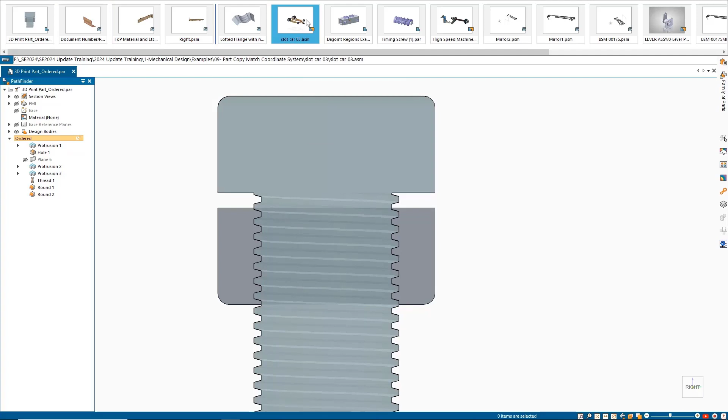Go ahead and use my recent documents gallery. It's actually a really cool feature. And simple little assembly here. We'll jump into this component part. We'll just edit into it, and we have a motor that we'd like to insert, and we have a destination coordinate system here. It's actually labeled motor position, not too important. We'll just go ahead and use our insert part copy.

And by the way, if you weren't in the exact folder, you could click the home button and that would take you right into the folder of your assembly, and we have a motor 01. We'll just go ahead and open that, and you see immediately the improved dialog, and we have 2 options here.

Besides all of the standard options that we've always had, we can choose the coordinate system inside the placement part, and the coordinate system inside. You can see that's highlighting for me so that I can verify. Simply click OK, and that will be positioned exactly the way that I want. Great new enhancement in Solid Edge 2024.

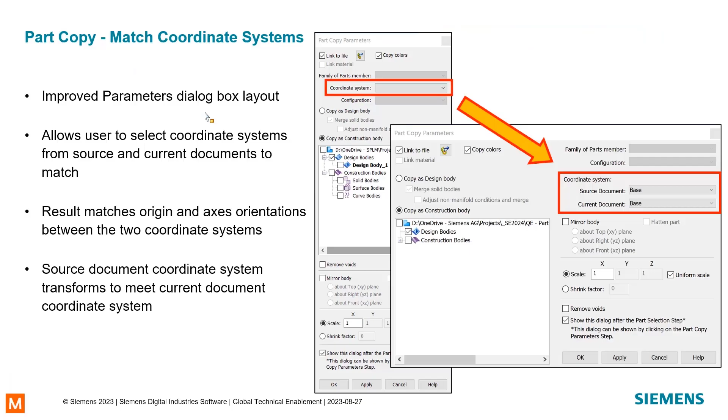This is a great improvement for removing hanging pieces of geometry that are created when there's a disjoint as a result of a Boolean operation. We see this maybe when creating multiple bodies to simulate machining operations, or it relates to the subtract command. I'll show you how that works. This is a great enhancement, but super easy to use. So this would be useful maybe for mold work or what have you.

So we notice that we have one design body, which is kind of our solid body, and we have multiple construction bodies, which are essentially our tools for subtraction. So we come up here to our toolbar and we find subtract, and it prompts for the target, and we right click or hit the green check mark, and you can select one or more. We can pick them graphically, or we can pick them in the Pathfinder, whatever you like.

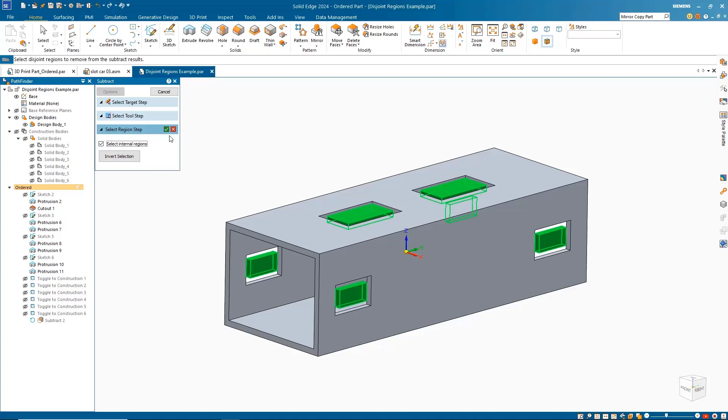And you can right click to accept, and now you have an option here at the end. You can one at a time remove the regions, or you can select all the internal regions. Option to invert the selection. And when you go ahead and hit finish, you'll see that those hanging pieces of geometry are removed nice and cleanly. Really handy for mold work or operation models.

So this is actually one of my favorites. We've had a few calls where customers have tried to 3D print parts using the new physical threads option that models the threads for you, and they've noticed the threads come out a little too tight. You might need to run a tap in the hole, so this solves that problem.

So you can add clearance to your physical thread by either percentage or by an absolute value, and this is applicable to an external thread or the hole command when you've actually turned on the physical thread option. And of course, you would only do this on a specialized case; you wouldn't want to do this to a fastener and then use that fastener thousands of times in a design. This is for a very specific use case where you want to print a bolt or fastener or something like that for maybe a lead screw. And we'll take a look.

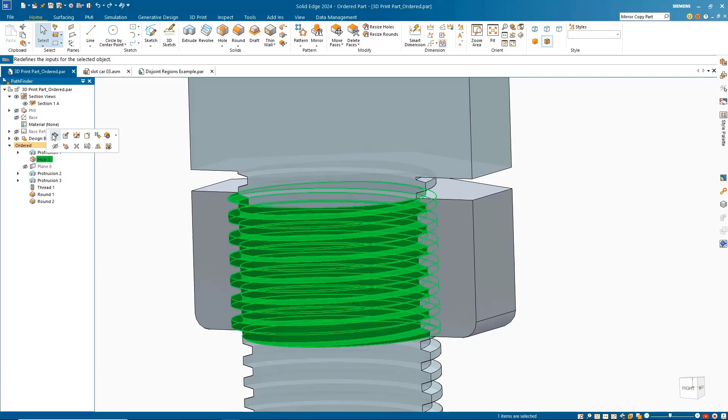So this is a multi-body part. Just for illustration, we do have a section view defined. That's how we're able to see that cutaway very clearly. So we can very easily go to our thread or our hole and edit definition on that. Check out the physical threads, and if you wanted to add a certain percentage, we'll try to type something in kind of large. It will kind of warn you the recommended range is somewhere between 0.5 and 2.5.

So I've kind of deliberately gone beyond the range, so we might go and give it a 1. So that might be just a little bit too big. Of course, if you try to push that too far, you'll end up with maybe some issues. And the same is applicable to the thread command. You'll find the same type of option. Physical threads, maybe you want to do an absolute value. You could do 0.2 millimeters, for example.

Next up is assembly modeling. Trim tubes has been added. Really easy to use, but powerful command using the assembly environment to trim tubes that intersect each other. They are created as assembly features, and you have the option of creating an assembly only feature or a feature down in the part but driven from the assembly. You simply select a primary tube, and then you can pick one or more secondary tubes, and they'll be trimmed to the primary tube.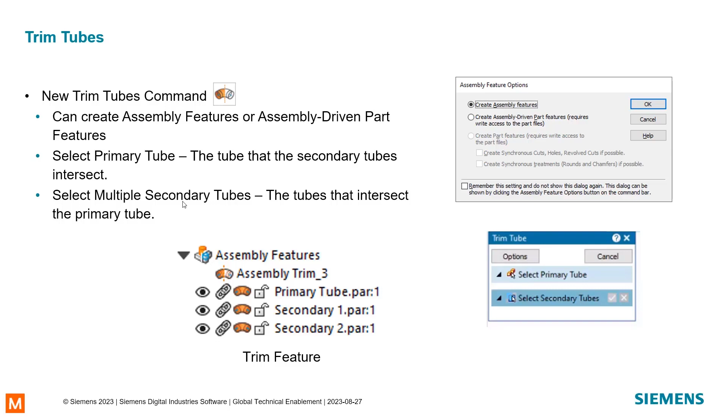There's a single selection for the primary tube, so there's no need to click a green check mark on the first selection. It just moves on to the second step, as you'll see in the demonstration. And this is an example of the results. You can see the secondary tubes are trimmed to the ID of the primary tube. It is just that simple. And of course it will update your drawings to reflect the volume and the tube length. I'll show you that in the demonstration.

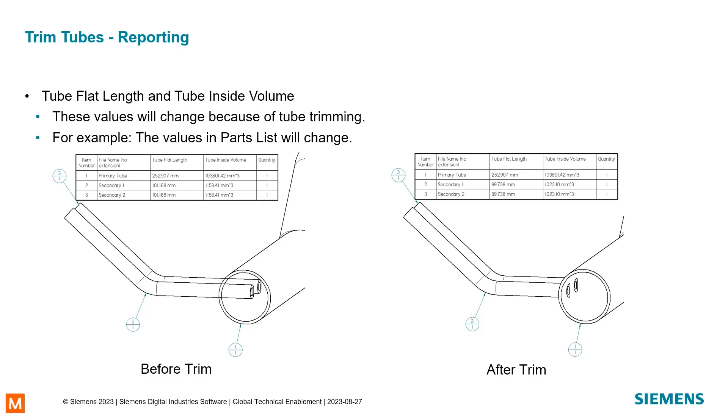And it also works as a trim extend. So if you have a mitering opportunity, it will trim away half and extend the other half based on the sketch. So not necessarily a 45 degree, but it bisects the angle of the sketch that was used to create the tube path to begin with. And I'll give you a demonstration of that as well.

Starting from the drawing, we have a table all ready to go. FYI, I just made a copy of the table and converted the parts list to an unassociative table so we can compare the values after. Other than that, it's just a basic drawing. We'll double click to open the assembly. And let's first do a little quick tube trimming here.

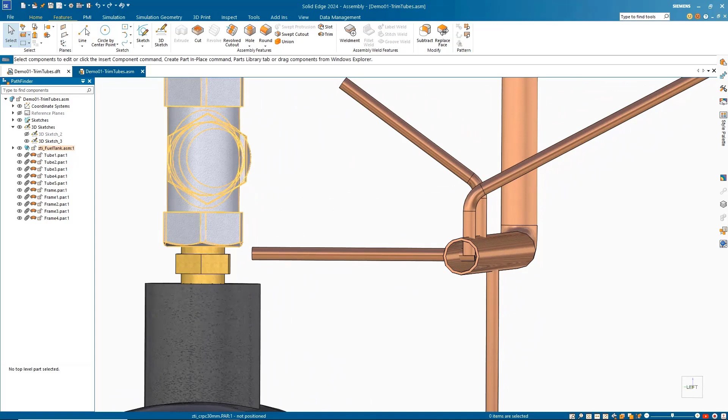So we'll go to Features and Trim Tube. You have the option in the beginning to create the assembly feature. I'll show you the difference. We'll first do an assembly-driven part feature. Click OK. First click is the primary tube, and then I'll just do one for the secondary and right click to finish. And you can see that that trims away the interior. And I'll just finish and do another one.

Again, we'll pick the primary tube, and you can see it moves me right on to the secondary tubes. And in this case, I'll pick more than one, just to demonstrate that you can do that. And you can see all the interiors are trimmed.

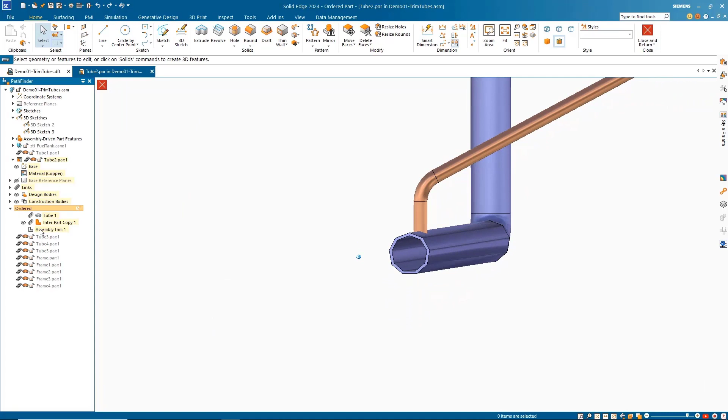Now, if we go and look at one of the tubes, let's look at this one, and we'll do an edit. You'll see how this works, where an interpart copy is created, and that is actually right in the tube part, so you can make a drawing of that part independently of the assembly if you wanted to. You could conceivably use an offset face if you needed to set that back a little bit from the ID of the tube. I don't see any reason why you couldn't do that.

And then we'll go ahead and use the command again, except we'll create assembly features this time just to be different. And we'll just click OK. And we'll grab this as a primary tube. And you can see it moves me right on to secondaries. And I can just right click through. So you can see you could do one primary and two secondaries. And you could just keep going with just very quickly click, click, right click.

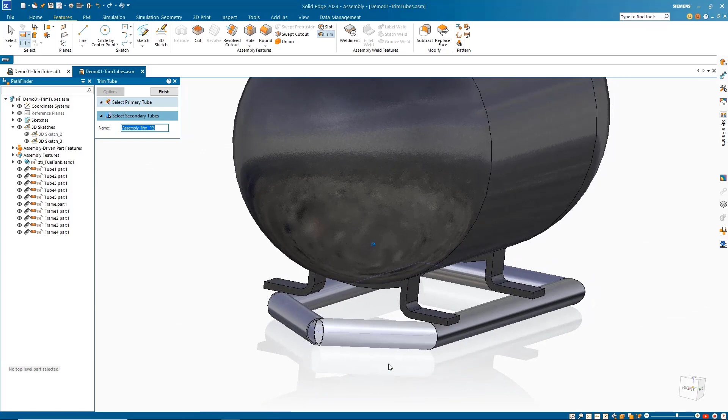And you can see we have assembly driven part features here and assembly features here. And of course the difference with an assembly only feature is that if you in-place activate into the part, you'll see it maintains its original geometry, and there may be reasons that you want to do that.

So let's jump back to the drawing. You should see the views are out of date. And just to illustrate how the parts list updates, we'll just update the view, and we can see the values changed and any minor balloon positions changed. Great enhancement in Solid Edge 2024.

Continuing with assembly enhancements, we have suppress conflicting relationships. This is a nice time saver. We've all encountered this before when you attempt to create a relationship and it conflicts with an existing one. You would have had to abandon your workflow, find the problem, possibly suppress relationships, and then go back to what you were doing. So this makes things much more productive.

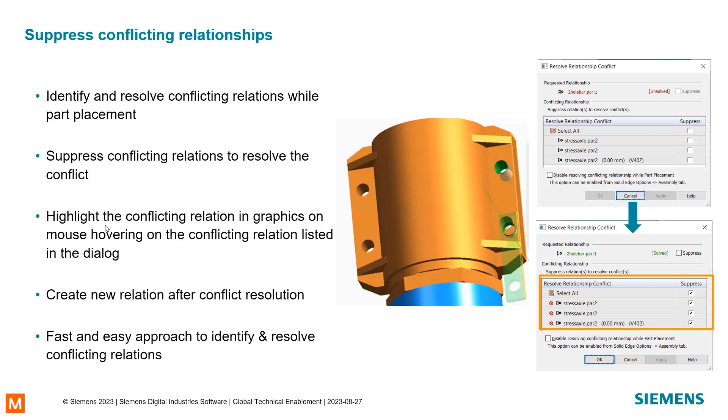It allows you to suppress the relationships that conflict, and then later you can go back and decide what you want to do, maybe delete that relationship or just keep it suppressed, whatever you want. The conflicting relationships will be highlighted so you can stay right in your workflow, and the new relation is created after you resolve the conflict. Super easy to use, requires no training at all.

And improved replace part. Using AI or machine learning for single component occurrence. This is a new capability that I'm certain will be expanded in the future. Again, a command that's very easy to use.

It does only work with a single part, as it says on the slide for now, and it supports planar and axial types. But essentially, when you see the dialog, you're free to just try any of the predicted solutions to see if one appears to be the solution that you want, and you can just click it and click finish. Super easy to use.

Let's start looking at resolve conflicting relationships. So we have a simple assembly here. We have a misalignment between a couple of holes, and we'll go ahead and use our assemble command. This works just as well if you grab a discrete relationship here. I'm just going to use assemble and FlashFit because it's kind of my favorite and most productive.

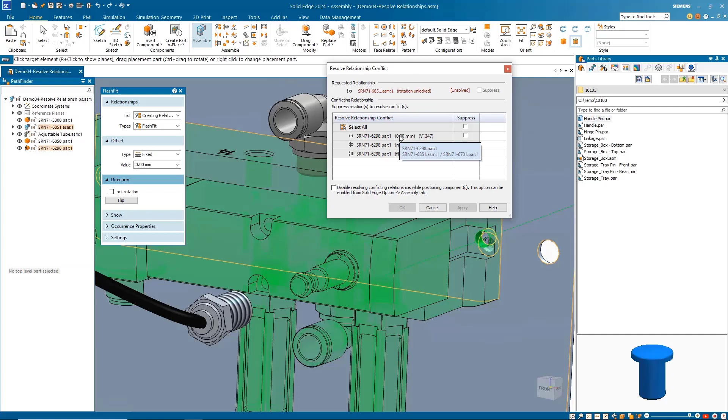So I'm going to attempt to align, and because the alignment cannot be achieved, we get the resolve relationship conflict dialog. If it was resolvable, you wouldn't get the dialog. And then you can just mouse over the relationships and you'll see them highlighting. In this case, I'll zoom out a little bit so we can see there's the axial on the other side.

So for example, if we relaxed that axial, this manifold could slide over. If we relax this mate, it wouldn't really have any impact. And you could just try it. You can just click the checkbox and hit apply and see if it actually resolves the issue. This is fairly obvious, so we kind of know that it's not going to resolve it.

And the axial certainly would solve the issue, but there's something else going on here. You can see that it is solved up here at the top, but certainly the issue is something with this planar align that's preventing the manifold from moving in a vertical position. So it's really easy to use and a nice productivity enhancement. So I'll just go ahead and hit apply there and hit OK,

and that's it. So then, of course, when you go ahead and select a component, you'll see the suppressed relationship, and you can again do what you want, delete it, what have you. And it certainly works in other areas. If we do an assemble with an adjustable part here, because of the conflict, we get the dialog, and it's fairly obvious now that there's an existing relationship.

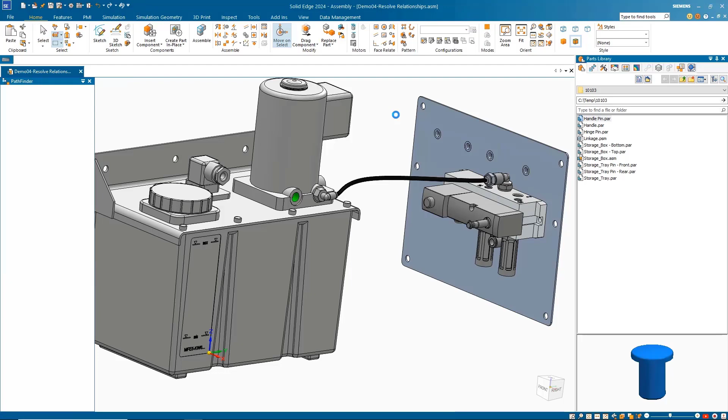But this is a great capability, and we're just going to open this simple assembly here from the recent documents list, and we'll come down here and do a replace on one of these cap screws. Remember, a single component for now, and we're just going to go ahead and replace part, and right click to accept. And let's see, this is 6552.

And you get this predictive AI replace part. And what's great about it is it's super easy just to try different solutions. And when you see the best one, just simply click finish. If you just want to use the default solution, you can just click that as well. And then it applies that solution. We'll run another one here on this little nut.

6142. And you see that there's a different number of solutions. There can be up to 5.

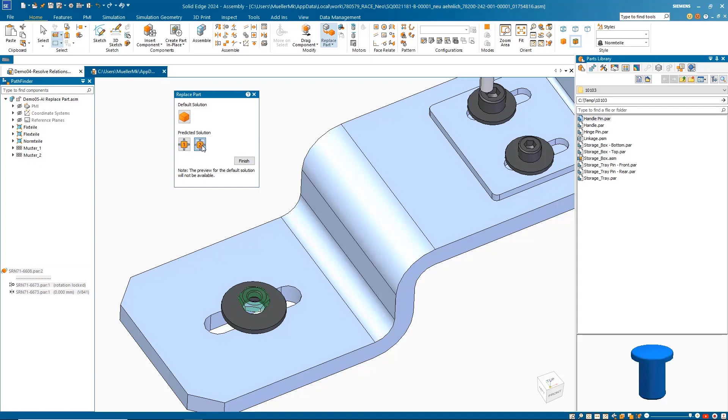Again, just crazy easy. Just click the button and see if that's the result that you want. And if it is, go ahead and hit finish. Pretty cool capability for Solid Edge 2024.

Just some more details about replace part. Up to 5. You can turn it off, certainly, either in your Solid Edge Administrator or in the options directly.

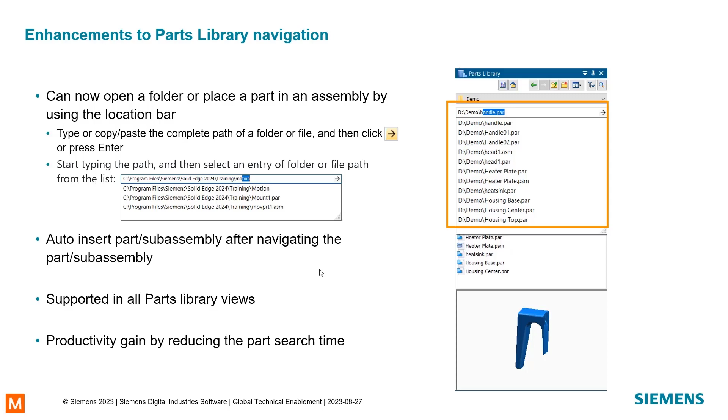Enhancements to Parts Library Navigation. This is a nice enhancement where you can more quickly find the parts in a similar way that you might do it in Windows File Explorer. But you can stay right within Solid Edge just by starting to type, and it will narrow down the list. You can also simply paste a path into that area. We didn't have that before. You always had to navigate to a specific folder and then drag the component in. So I really like that, it's a great addition, and big productivity gains.

Searching in the Pathfinder, so searching to build a select set within existing components has also been improved. You can now use wildcards, and this is a great way to just get components into a select set. Maybe you want to hide them or isolate them. Really nice. There's some examples of wildcards.

The pound sign will match any number. Star will match any character, and basically builds your select set. And we'll give you an example of that.

Also right there, you can also filter what's shown in the library. So notice there's 2 fields. One is kind of like a Windows File Explorer field where you can paste an entire path, and then just below it we have a kind of search filter field, which works the same as what's in Pathfinder, except it filters out what's shown in your library, your parts library, the files that you want to bring in. So I think in the past you would maybe click into the white space and start typing briskly, and that would often take you right to the component, and that worked great, but this is way better.

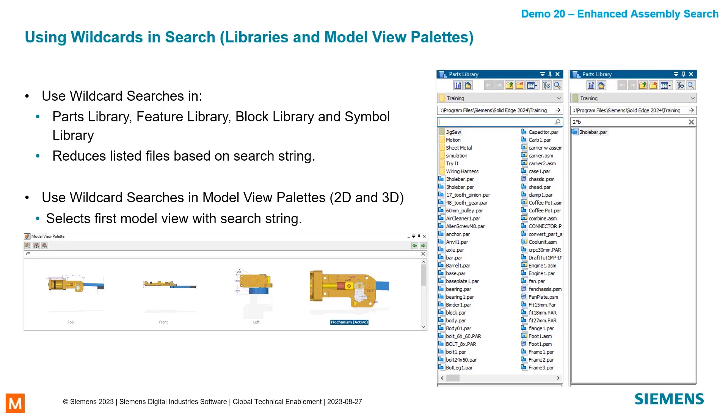So let's take a look at this. First in Pathfinder, we'll come over here, just expand things out a little bit, and in this field, let's try - maybe I'll just type some random values, and I'm going to just press enter, or you can click the little search. So you can see it finds anything with 67, and that's quite a large number actually.

So we could probably narrow that down or expand it. Let's try 63. So that you can see that returns quite a large results. So let's try using a wildcard. So we'll use 63 star 5. So this is going to pick up 63, any number of any characters, and then a 5, and you could see it picks up quite a large set.

So the reason you may want to do this is you may want to isolate, so you can look at certain components, or it's really just about building a select set for you. You can also include the file extension. It's searching on this text that you see right here, so even including the .par and the colon and the instance number at the bottom. So if I did a let's see, 637

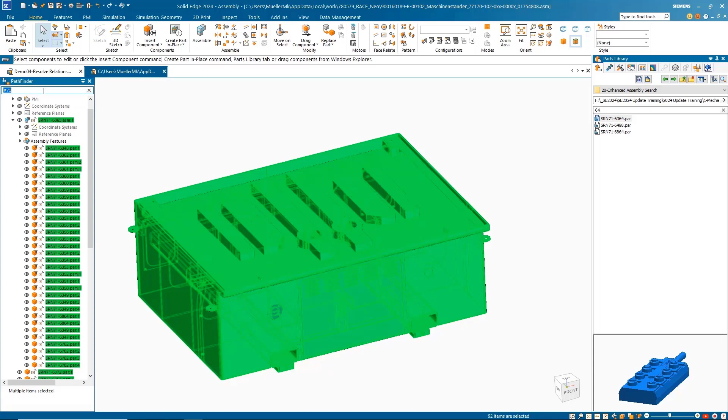Mostly, as far as remembering characters, just the star and the pound sign I think are really useful. Like if I just searched on 71, you could see it picks up a bunch, but if I wanted to make sure there was a number in front of the 71, so that's basically all you have to remember.

And the same thing works over here in your parts library. So here I've just, if you don't have anything typed in, you're going to see everything that's in that particular folder. And if you start typing a search result, then it'll narrow down or filter out what's shown in that window. And then you can just click it and drag it in.

And here, this field is, I'll expand this out because I'm in kind of a deep folder structure. So you can, as I said, just paste an entire path in there, which is handy. But you can also just start typing, and then it will find it. And then if you hit return, it'll just take you right into the placement of that component without having to pick it from anywhere, which is great. Super productivity.